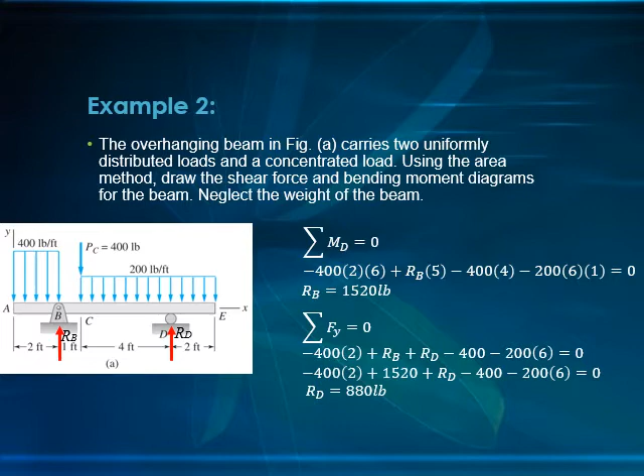Next, we do summation of forces in Y equals 0 to determine the value of RD. So we have here 400 negative, it's going down. Negative 400 multiplied by 2 plus your RB going up, kaya po positive, plus your RD, assuming it's in the upward direction, minus your 400 here, minus 200 multiplied by 6, since it is a uniformly distributed load. So we arrive at an answer of 880 pounds for the reaction at D.

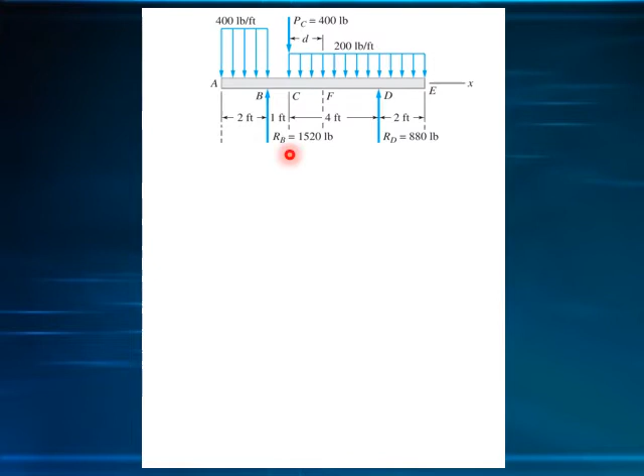Okay, so next, this will be our load diagram, class. Again, we're going to extend all these lines below for our shear and moment diagrams. Below our load diagram will be our shear diagram, and below our shear diagram will be our moment diagram. So we're going to start with the shear diagram, and our basis for that will be our loading diagram.

So first, we have negative 400 times 2 because of this load. We have 400, yung intensity niya, multiplied by the distance or the length, that is 2 feet. That will give us negative 800, and the diagram goes like this. Okay, bakit po ganito? Bakit po may slope siya?

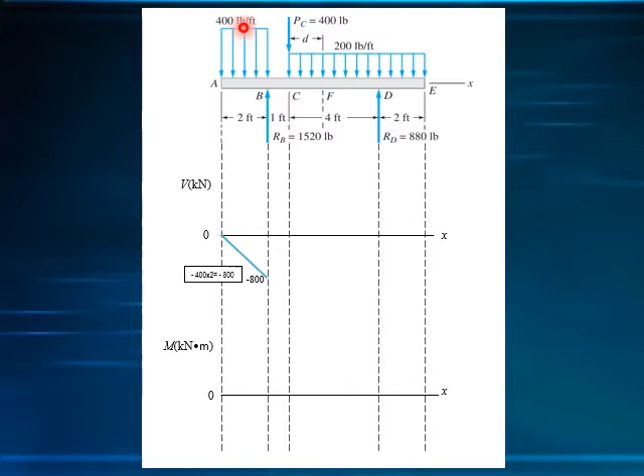Dito, ang sabi ko nga dun sa example number 1 natin, if in the loading diagram the slope is zero degree, magkakaroon na siya ng first degree dito, and the moment will be second degree na. So ibig sabihin, curve na siya pagdating natin dito sa moment.

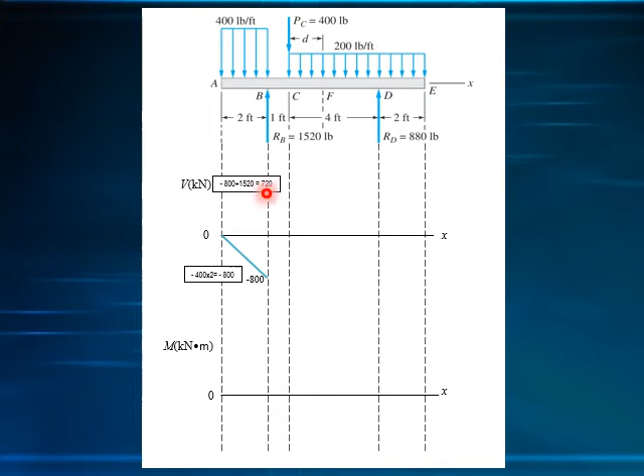So, after that, at this point, we have a reaction, which is RB here, and that is equal to 1,520. It is acting at this point only, class. So, dito rin siya mag-act. So, negative 800 plus your 1,520 will be equal to 720. So, positive 720 siya.

In between B to C, wala tayong ibang load. So, from B to C, constant po ang shear natin dyan. So dire-diretso lang din. From this point, we have a concentrated load at C, which is the 400 pounds here. So, magre-reflect din siya dito, class.

So, we already have the 720 here minus your 400, and that will give you 320. And it's going down. 720 minus your 400 will give you 320.

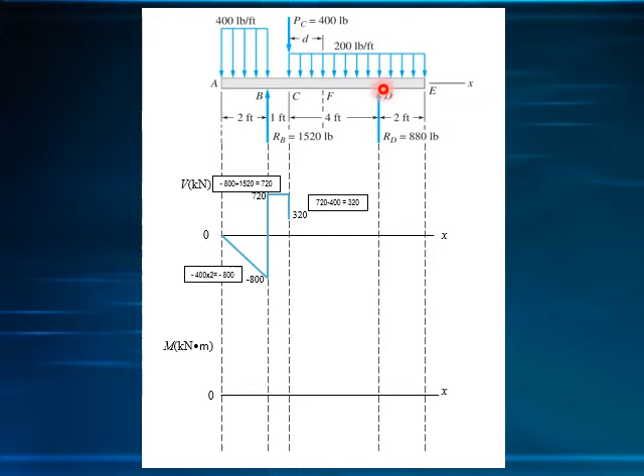So next we're going to analyze this part, C to D. And that is a uniformly distributed load. Again, may slope na naman po yan. So what is this one? We already have the 320 here minus your 200 multiplied by 4. We are just computing the area, class, since nasa area method tayo.

Ganito po ang pagkuha. This is an alternative way of doing the shear and moment diagram. Unlike dun sa una natin na ginawa sa part 1, where we cut per segment to determine the equation and then substitute the distances to arrive at the diagram, this is a simpler way to arrive at the shear and moment diagram. So we already have here 320 minus your 200 multiplied by 4.

Hindi po natin pwedeng idiretso, class, na multiplied by 6 dahil meron po tayong another reaction here. So, meron na siyang discontinuity ng loadings. So, therefore, negative 480, ayan na po siya. So, from this point, there is a concentrated load acting at this point D, and that is 880 pounds. So, magkakaroon tayo ng negative 480 plus 880, and that will give us a 400 shear at point D. Okay, so magiging ganyan siya, class.

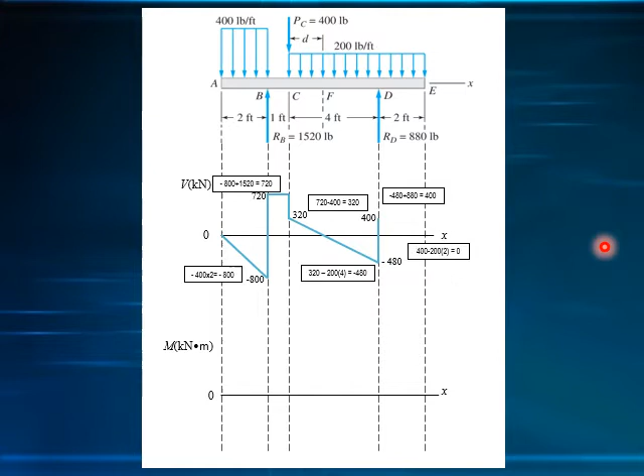And lastly, from 400 minus this area here. Okay, we have here 200 pounds per feet multiplied by your length or the distance, that is 2 feet. Kaya po ito, and that will give you a 0. So magzi-0 na po siya dito sa point E. Ganyan po. So that is our shear diagram, class.

So next, we're going to do our moment diagram. Class, when you do your shear and moment diagram, please highlight this or lagyan nyo lang siya ng kung hanggang saan yung shear diagram and moment diagram nyo para mas maintindihan namin. Okay? So, we're going to proceed with the moment diagram. We have here the negative 800. Our moment diagram, as I've mentioned earlier, the basis will be our shear diagram. Kung ano lang yung mga areas dito, class, yon ang magiging basis natin para i-draw natin si moment diagram.

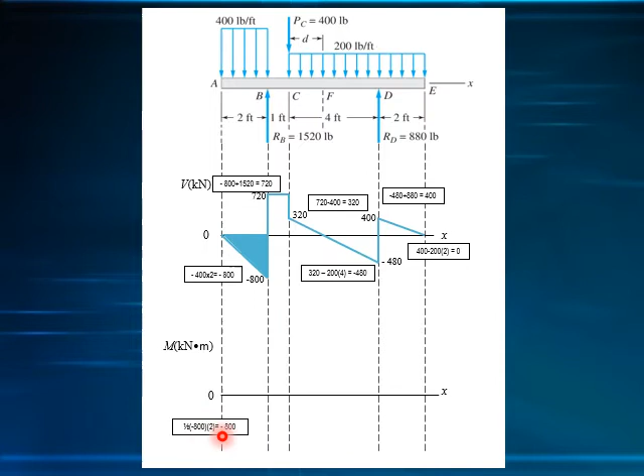Okay? So, we have here a triangle. What is the area of a triangle? We have 1/2 base times height. So, the base will be your 2 feet and your height will be your negative 800. So, that will give us 1/2 negative 800 multiplied by 2, that is equal to negative 800. So, ganyan po ang ating curve, ang ating diagram sa moment. Sabi ko nga kanina, mag +1 lang po tayo sa slope. If this one is 0 degrees yung slope niya, this one will be first degree, and this one will be your second degree curve na po siya.

So, next, we already have your negative 800. What is the area? Ano yung susunod na area? That will be this area here. So, we have there negative 800, plus your area, which is 720 multiplied by 1, base times height, diba? And that will give you an answer of negative 80. Straight po siya. Kasi dito 0 degrees yung ating slope. So this one will be first degree. Isang line lang po siya na with slope.

Next, we're going to analyze this part. But for our triangle, we have a formula of 1/2 base times height, di ba? But what is our base? For this part, hindi natin alam kung hanggang saan nag-cross dito sa part na to. Hindi natin alam kung saan nag-zero dito sa point na to. So we're going to solve for that by using similar triangles. So we have here the triangle here.

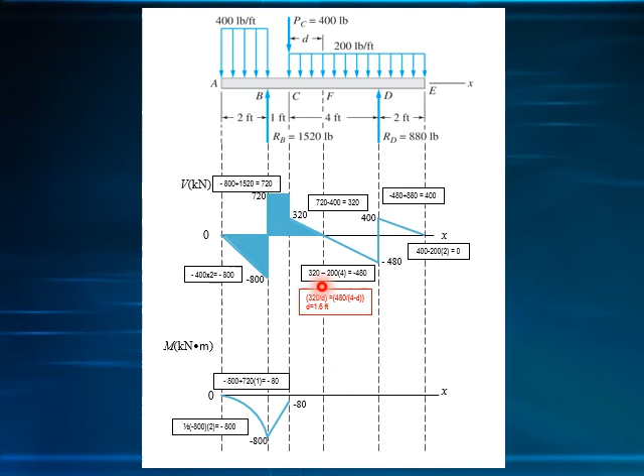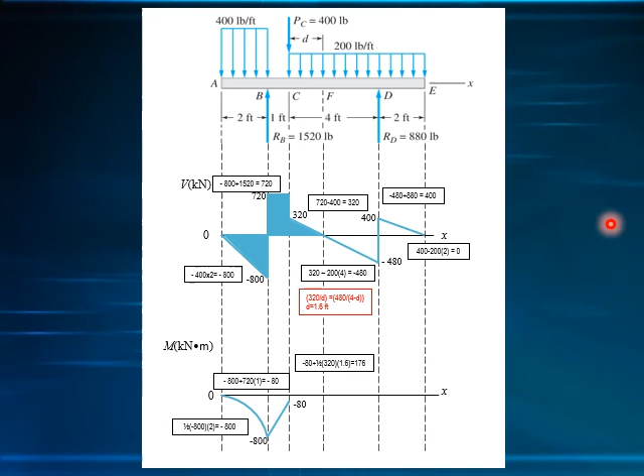So pwede na nating isolve yung area niya. So we already have negative 80. Negative 80 plus your area here, which is 1/2 base times height, 1/2 multiplied by 1.6 multiplied by 320. Ayun po siya. Okay, negative 80 plus 1/2, 320 multiplied by 1.6. And that will give you a value of 176. Yan na po siya. Okay?

So next, we're going to analyze this part naman. What is the area of this part? So we have here 176, 176 plus 1/2 negative. Negative po ito, kaya negative po yung doon. Negative 480 multiplied by your 4 minus 1.6. This is the whole 4, okay? Minus your D, that is 1.6. Para makuha natin yung base nitong part na to. And that will give us the value of negative 400. So, ganyan po yung curve natin dito sa ating moment diagram.

Lastly, we're going to analyze this triangle here. Again, what is the formula for a triangle? We have 1/2 base times height. We already have this negative 400. So we have there a negative 400 plus 1/2 400 multiplied by 2. And that will give you 0. Kaya magzi-0 na po siya dyan sa x-axis. So class, this will be your diagram for the moment, and this will be your diagram for the shear. Okay.